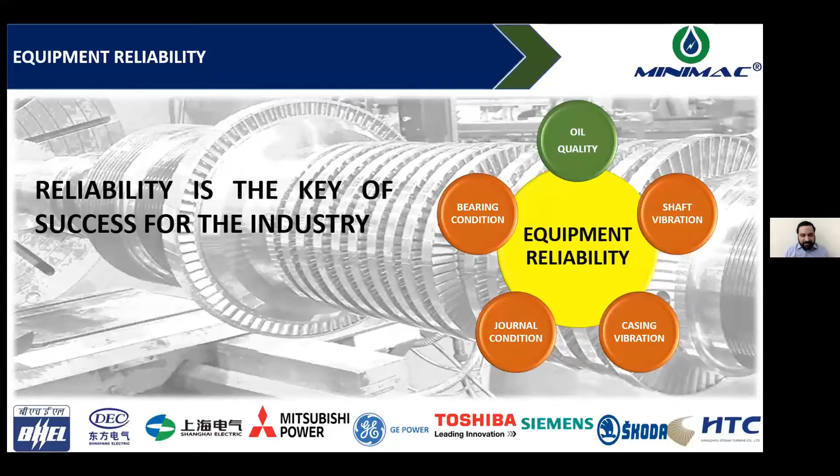There are some challenges with regards to lubricants which we have laid out here, like high temperature fluctuations in your lubrication systems, and high speed of the components or machine parts where lubrication oil is going. For example, a gearbox where rotation is happening at a certain RPM, or a general bearing of a turbine where there is a certain RPM of the turbine rotor.

Coming to the next property or challenge of lubricant, it is high moisture contamination. Now, moisture or water or humidity in the lubricant is a very damaging foreign impurity, and it must be handled very well. Another challenge of a lubricant, or you can say a very important criterion for deciding the selection of lubrication, is heavy loads. So you need to take care of that as well.

Entrained air, which means a lot of bubble formation happens because of the turbulence and other sources where the air or oxygen inbuilt into air gets into your lubricant system. Even that is a challenge. Heating of various components because of the lubricant or because of friction or because of many other reasons. So heat as such is a major criteria. We use a lot of cooling systems around our lubricant systems for maintaining the temperatures.

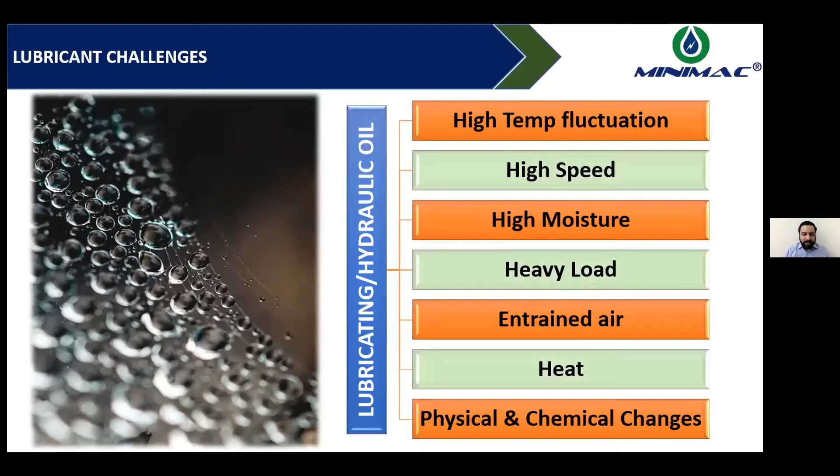Now, let us summarize what are the functions of oil or industrial liquids or fluids. So these are some 9 different functions which we have laid down, and these are to provide lubrication, a uniform lubrication around your mating surfaces of various machined components. Then to prevent the rust formation, like I have some examples of rust preventive oil, which are used for the steel merchant products or finished goods of steel. And while they go into the merchandise, there is a rust preventive oil which has to be applied on the steel goods.

Then to improve the oil degradation solubility, wherein any products with regards to oil degradation, if they are formed, they must get solubilized into the fluid itself so that they don't have much of harmful effect in your oil. For that, a lot of lubricant companies use additives to reduce the hydrolysis effect. Because of the water in a lubricant, there might be certain degradation activities happening. So in order to have those minimized, you have certain additives in the lube oil to minimize acid attack on the copper parts and other alloy parts, and to improve the filtration efficiency of a lubricant.

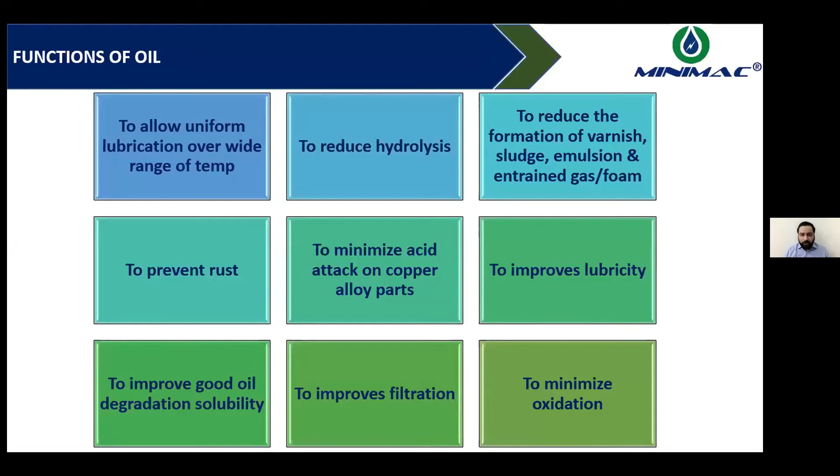There are certain additives which are added into the lubricant, and there are few others like to improve the lubricity, to minimize oxidation, to reduce the formation of foam, sludge or varnish.

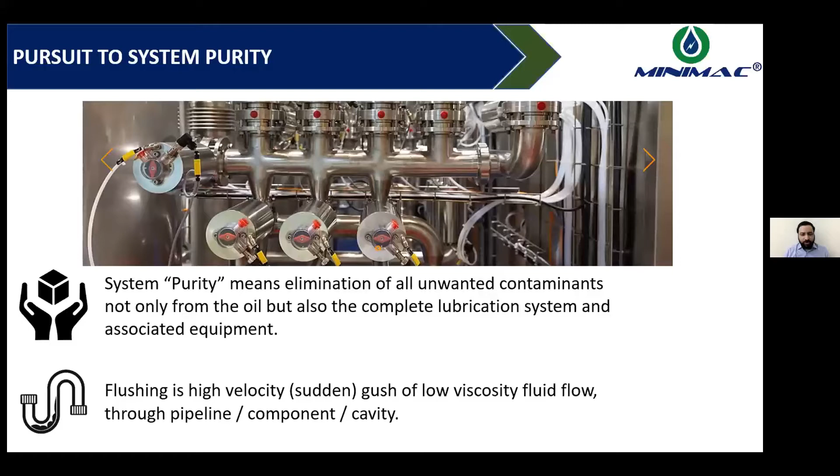Now, taking up a different topic on system purity or a complete purification or complete cleanliness of your entire lubrication system. So for this pursuit, there is a technology called flushing. So what is flushing? Flushing is using a very high flow or high velocity of a low viscosity fluid, which is passed through the pipeline to components and cavities of your lubrication system. In order to have a successful oil flushing, there are certain cornerstones which we have summarized in our previous webinar.

The first one is the correct decision of a flushing flow rate. So while you are deciding on good flushing for your system, you must decide first on what flow rate you must adopt. There are certain calculations for deciding the flow rate, where the important criteria is to have turbulence in your system. In order to have a turbulence, you need to have Reynolds number more than 4,000.

Second important feature under flushing is the fluid viscosity. So the fluid viscosity must be as low as possible so that you can achieve a better turbulence even at a lower flow rate. With a low fluid viscosity, you would be able to achieve a better Reynolds number, and that's demonstrated in the formula given here. The lower the viscosity, the higher the Reynolds number; the higher the velocity, the higher the Reynolds number. So thereby we can relate the properties of the flushing mechanism with this formula of Reynolds number.

So all we need to keep in mind is the Reynolds number must go as high as possible. And in order to do that, we need to check what factors are affecting it.

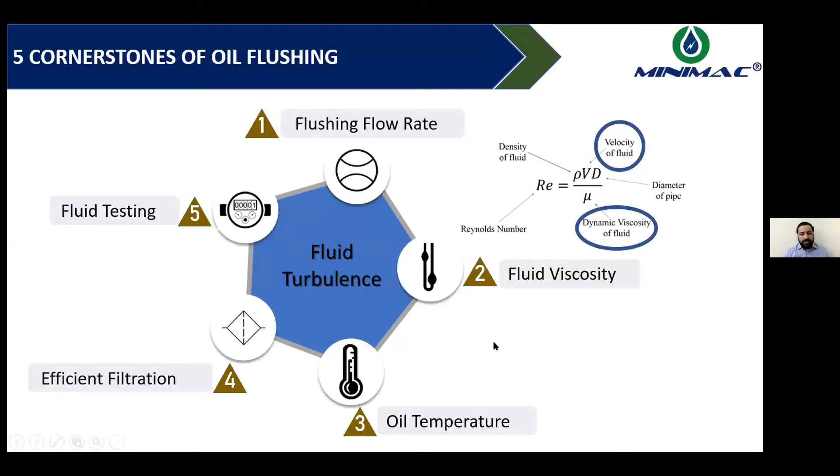Coming to a different topic of contamination in phosphate esters. Phosphate esters, or we normally call them fire-resistant fluids, are used for the application of turbines. And in turbines, there are governing systems. These governing systems or control systems have electro-hydraulic controls. And these electro-hydraulic controls are governed, or managed, by special valves.

These are servo valves. And in these servo valves this fluid, that is phosphate ester fluid or fire-resistant fluid, or you can easily call it EH oil or EH fluid, has a very important role. So they form a very important role in the productivity, or the run time, of this EH system.

The kind of contaminations which hamper the objectivity of these fluids is water contamination, moisture, which is very harmful. Water can enter through the tank headspace. It can enter through the leakages. Then there is acid formation. Acid formation happens because of degradation of these phosphate ester fluids.

Lowering of resistivity. So resistivity is a very important parameter when it comes to phosphate esters, because phosphate esters or fire-resistant fluids go into the EH valves, and inside the EH valves, if there's a lowering of resistivity of these fire-resistant fluids, there would be an issue with the functioning of these servo valves or EH valves.

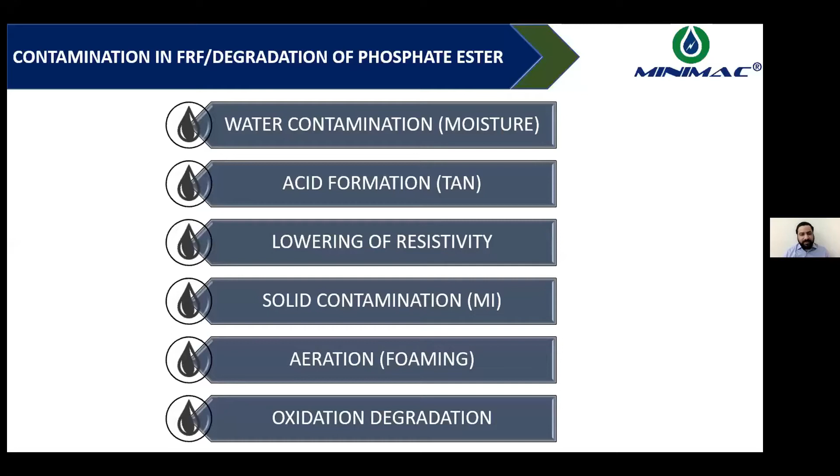Oxidation degradation. So oxidation degradation is again a byproduct of having moisture contamination and solid particle contamination, metallic foreign impurities in the fluid. Oxidation degradation is a very, very damaging scenario for your fluid, and it must be avoided as much as possible.

Because of degradation, you would experience formation of sludge. So what is sludge? Sludge is a very sticky substance which is deposited at the base of your tank. It is deposited inside the walls. So if you have problems of valve hunting in your system, or a black surface developing on the base of your tank, or shining surfaces on the internals of your bearings or other machine components, this is all what we are assuming is sludge.

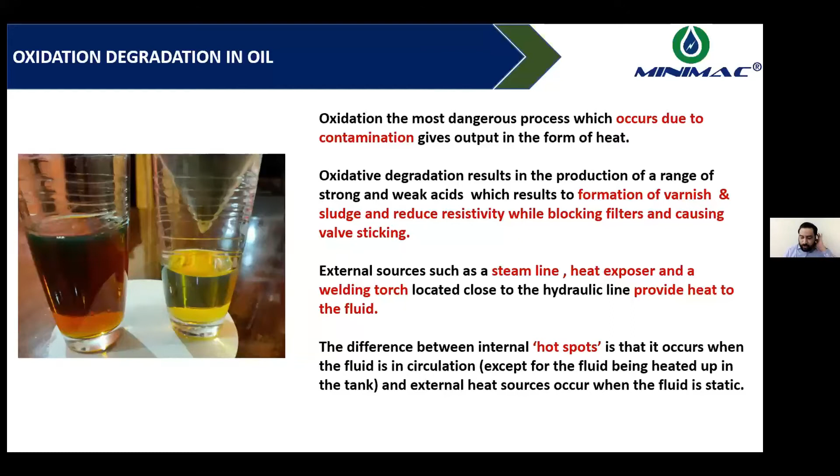And sludge is something which would lead to a very thick, irremovable, shining surface formed on the surfaces of your equipment, and that is varnish. So oxidation is a very damaging phenomenon for your fluids. We must try to have a solution for reducing any possibilities of oxidation in your fluid.

Coming to a very important contamination, that is moisture contamination in the fluid. So moisture exists in your fluid in three forms: the dissolved form, the free form and the emulsified form. The dissolved form of moisture is where the molecules of moisture get completely soluble inside your oil.

Free water is where the moisture particles are not dissolved inside the fluid. As water has a higher density than the oil, in most cases water will settle down by gravity, and you will find it at the base of your tank or reservoir. But when your reservoir is in turbulent condition, this water would be mixed up with your entire fluid. And this free water might be a reason for a lot of cavitation related problems.

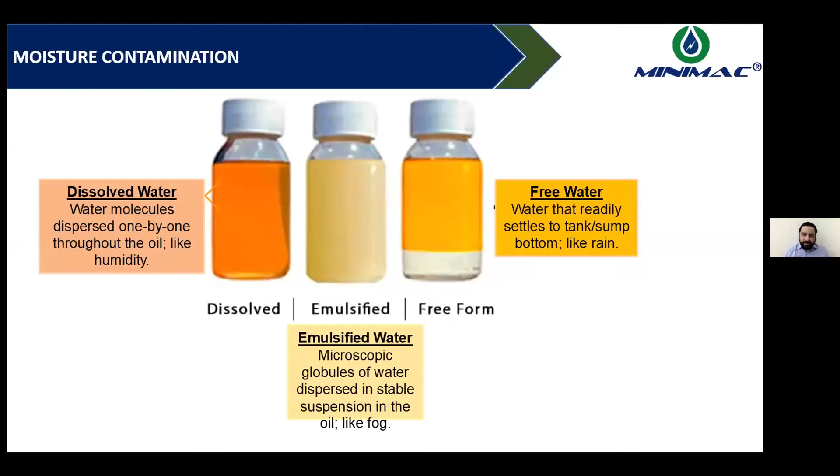When the dissolved content of moisture increases beyond the saturation point, beyond which your oil can't dissolve any more moisture, that's called emulsification. So the center image in the screen is the emulsification state, where the dissolved water has reached a level beyond which it can't further dissolve. In such emulsified conditions, you must either dehydrate your fluid by using certain devices and equipment, or you might have to remove it completely and replace it.

What are the effects of contamination? We might have seen a lot of presentations earlier. Contaminations have multiple effects on your lubricant and the system. They are the main reasons of oxidation, acid formation, aeration in your system, and cavitation in pumps. There would be experience of sludge formation on various components. Scuffing action would lead to certain damages to your machine surfaces.

Corrosion because of acid formation would also be seen, and an irremovable surface of varnish would be deposited at various surfaces, and varnish would lead to creation of hot spots in your equipment. There would be sudden temperature rise of surfaces. You might experience certain thermal or vibration related failures in your systems.

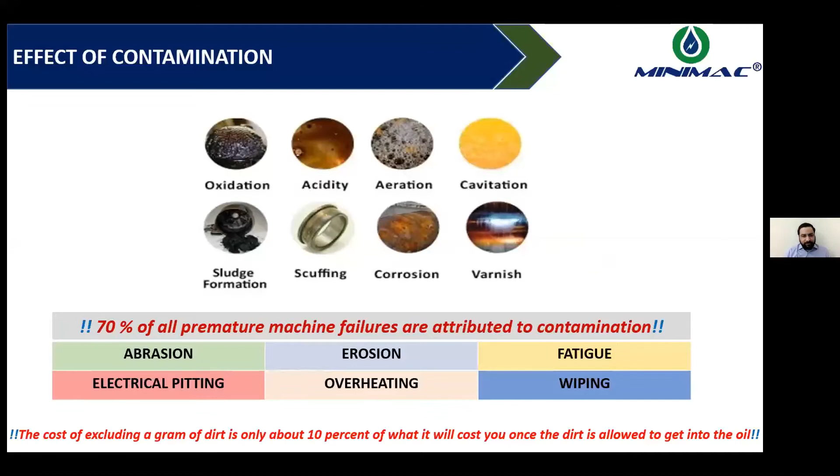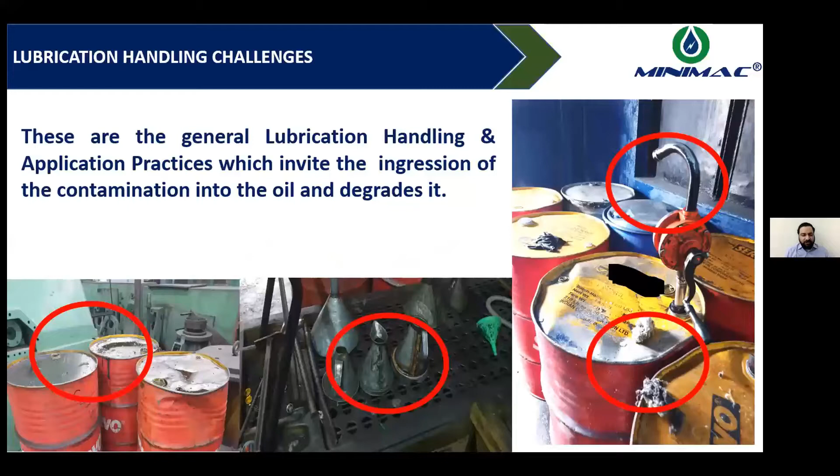Now, we have also talked about the best practices on the topic of lubrication handling. Here are certain pictures which we are just trying to remind you to avoid. If we are having such kind of situations in our plant, we have a solution for you guys. We would be talking about that.

Now, there are certain moisture removal techniques, as we talked about moisture contamination. There are some 4 or 5 major techniques which we know of. These are gravity separation, a little slow process, where you allow the water to settle down. Second is a centrifugal separation process, where you rotate the entire fluid and water mixture through a centrifuge; water, being a higher density fluid, will come out of the centrifuge in a separate line.

There is a technique called coalescer separation. Coalescers are elements which allow two different densities of fluids to separate while they pass through the coalescer. This is also a very common technique when it comes to removal of free water from your fluids. Very popular for the turbines, gas turbines or steam turbines.

Another technique is absorbent separation. In absorbent separation, there are certain elements which are hydrophilic in nature, and they would absorb the moisture content from your fluid. And the final one is vacuum dehydration or vacuum separation, where you pass the mixed fluid or contaminated oil through a system which has a vacuum chamber, and that vacuum chamber would enable the evaporation or dehydration of water from the fluid volume into the chamber of vacuum.

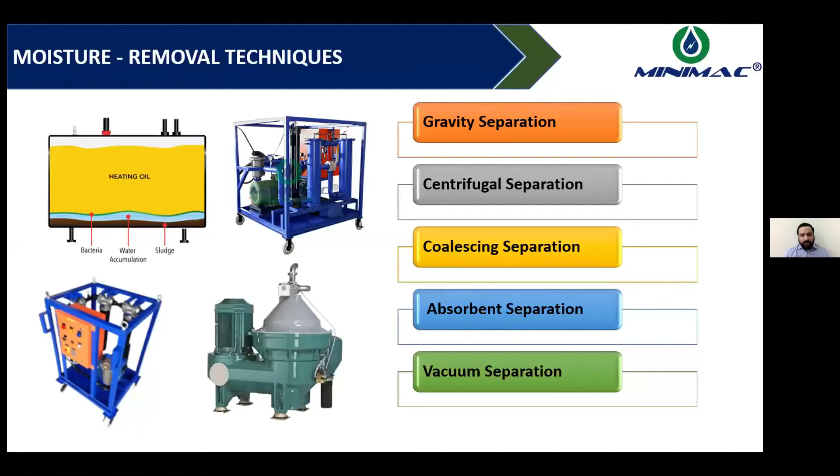What are the benefits of reconditioning your fluid? It has certain environmental benefits as well as certain financial benefits for your plant and machinery. You can extend your oil life and have better reliability for your machine. You can certainly reduce environmental contamination because you can avoid a lot of waste disposal of the fluids. You would be saving cost on oil replacements. A lot of time and effort is saved because you would be saving a lot of downtime for your plant.

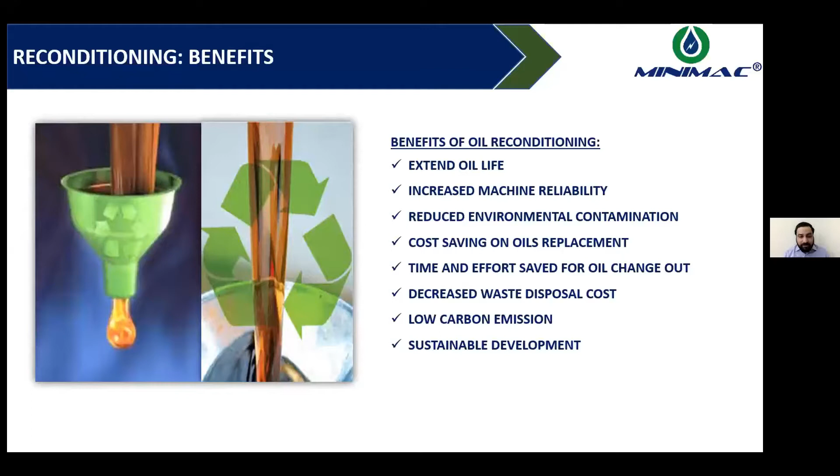Now here we have a program called RILA. The acronym RILA stands for Reliability Improvements with Lubrication Assessment. Under this program, we can assess the entire condition of your plant with regards to lubrication management. The approach which is adopted is listed down here. There would be reports generated, specialized for your plant, and certain implementation suggestions would be given, like you can see on the right-hand side of the screen.

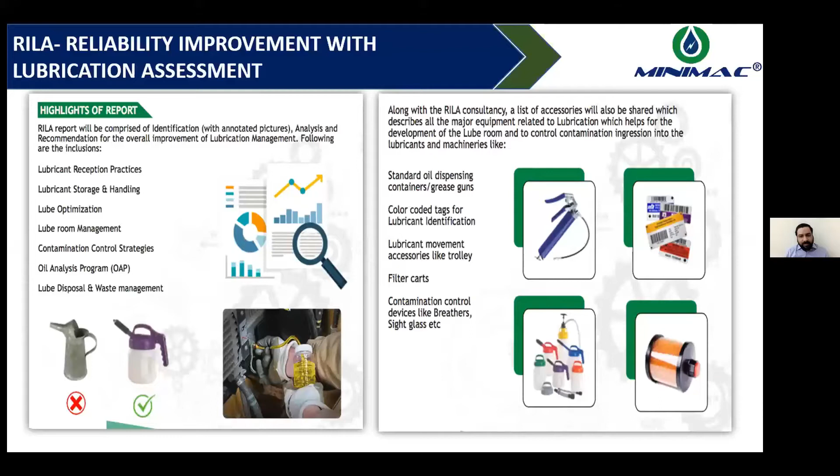So let's together begin this journey of having better reliability-centered maintenance for our plant. That's why it's important for us to know which are the verticals under reliability-centered lubrication. The first is reception of a new lube. Second is storage and handling of the lube. The third is sampling and oil analysis. The fourth one is reconditioning of our lubes. And of course, improve our intentions towards lubrication reliability.